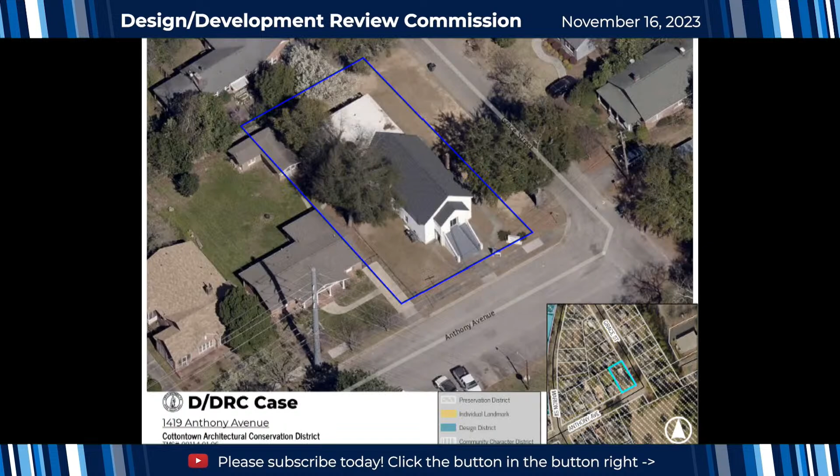The next case is 1419 Anthony Avenue, a request for preliminary certification for the Bailey Bill and for a certificate of design approval for exterior changes. This is in the Cottontown Bellevue Architectural Conservation District.

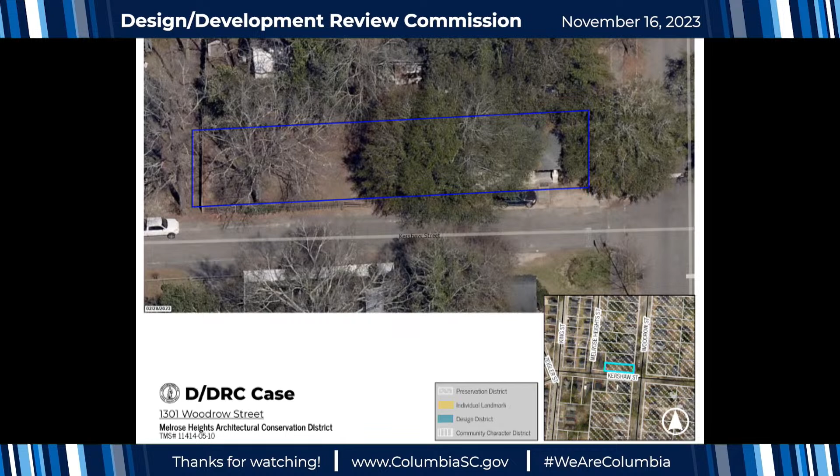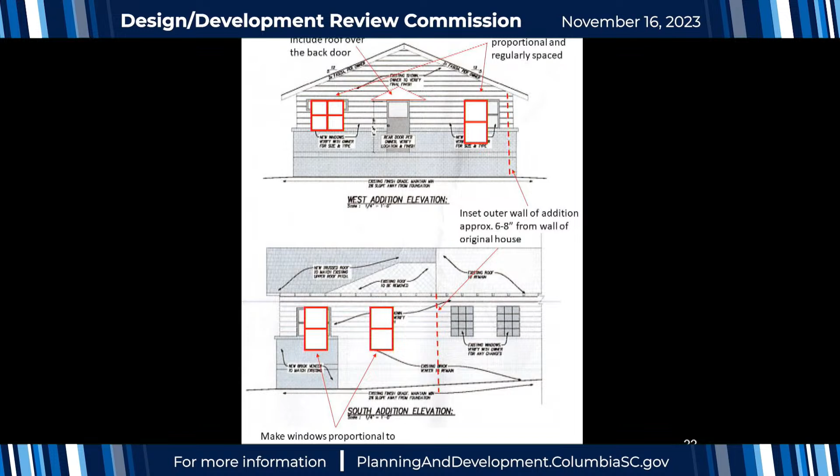The third item is 1301 Woodrow Street, again a request for preliminary certification for the Bailey Bill and for a certificate of design approval for an addition. This is in the Melrose Heights Oak Lawn Architectural Conservation District.

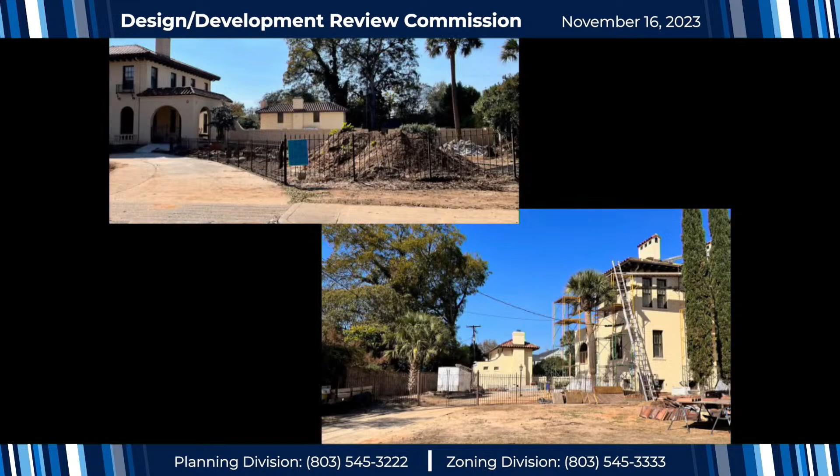Our last item on the consent agenda is 303 Saluda Avenue. This is a request for a certificate of design approval for an addition and an outbuilding. And this is in the Wales Garden Architectural Conservation District.

Thank you. Is there anyone from the DDRC that would like any item removed from the consent agenda? Is there anyone from the public who would like an item removed from the consent agenda?

Would anyone like to make a motion? I move to accept all the items on the consent agenda and to accept the meeting minutes. Or am I doing that one too? And the minutes from the last meeting. I'll second.

Mr. Broom? Yes. Ms. Sims Branham? Yes. Mr. Greenberg? Yes. Mr. Lee Decker? Yes. And Mr. Salibi? Yes. Motion passes.

Thank you. I believe we're moving on to the regular agenda now.

Can you all hear me? Excellent. So the first case on the agenda is 1245 Huger Street, which is next to 405 Gervais Street. The applicant is Seth Mendelson of Silver Hills Development, Inc., and it's within the City Center Design District.

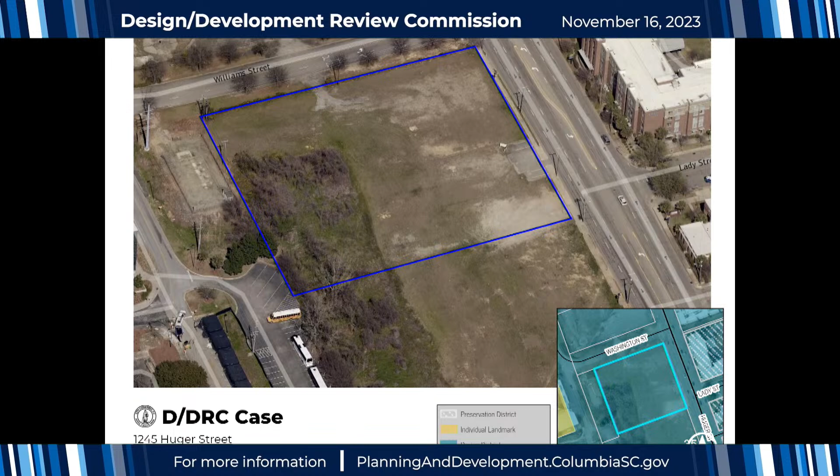So section 5.2 of the guidelines refers to the architectural style or theme. One of the public comments in September was that the architecture was contextually anomalous with regard to character, materials, and style of the district.

You can see here that the proposal includes significantly more brick and additional detailing, such as brick corbelling and relief patterns that are more in alignment with the character of the vista.

Section 5.2 addresses building mass and organization and reads, 'The height and scale of new buildings in city center should complement existing structures while providing a sense of human scale and proportion. New infill structure should be designed to provide storefront windows, doors, entries, transoms, awnings, cornice treatments, and other architectural features designed to complement existing structures without duplicating a past architectural style.'

This section outlines guidelines for building mass and organization. While these guidelines do not address the regulatory uses of the building, the city strongly encourages that in retail and commercial areas, the city center, the ground level of buildings should be developed with retail uses. Such uses draw activity to the street, thereby enlivening the area.

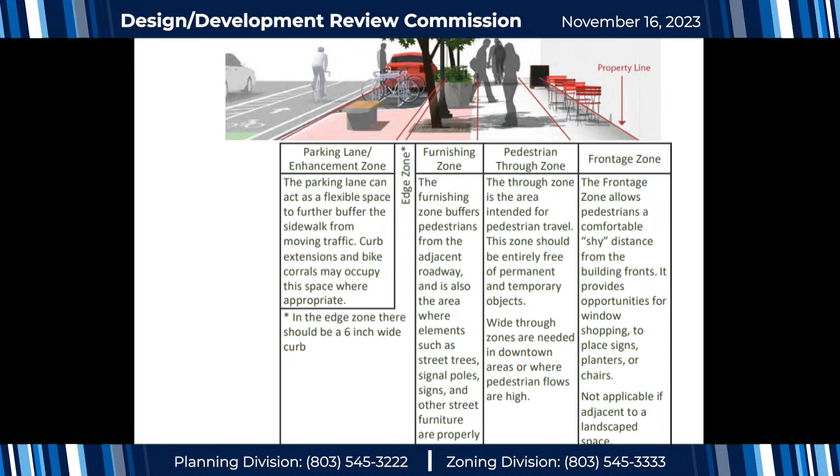So we also provided the applicant with section 9.3.11 of the engineering regulations, which outlines ideally what the pedestrian realm should look like adjacent to the street. You can see that in this slide.

Sidewalks are the most fundamental element of the walking network, as they provide an area for pedestrian travel separated from vehicle traffic. A variety of considerations are important in sidewalk design. Providing adequate and accessible facilities can lead to an increased number of people walking, improved safety, and the creation of social space.

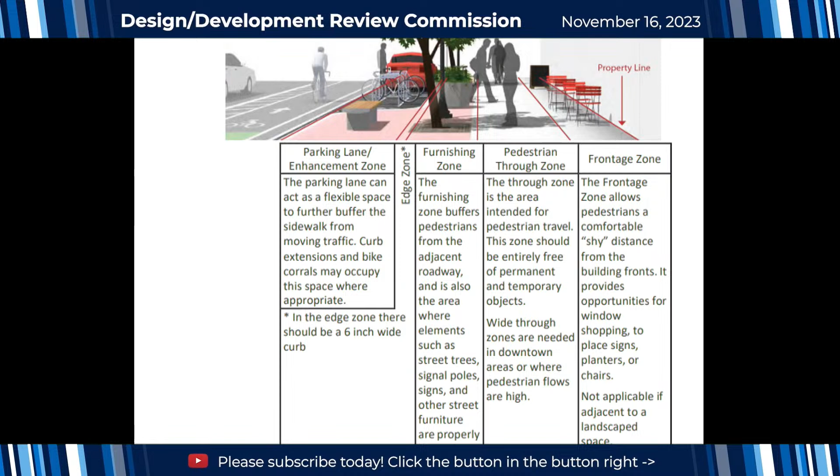Along Huger, the current drawings demonstrate a setback that varies between 9.2 and 15 feet with the rhythm of the architecture. The proposal includes an 8-foot sidewalk measured from the back of curb with 4-foot pinch points to accommodate 4-by-4-foot tree wells.

The trees are appropriately located between the road and the sidewalk to provide a buffer for pedestrians within the sidewalk. The applicant has provided pedestrian scale light fixtures in alignment with the trees.

Approximately a half foot to a foot of space remains between the back of the sidewalk and the property line.

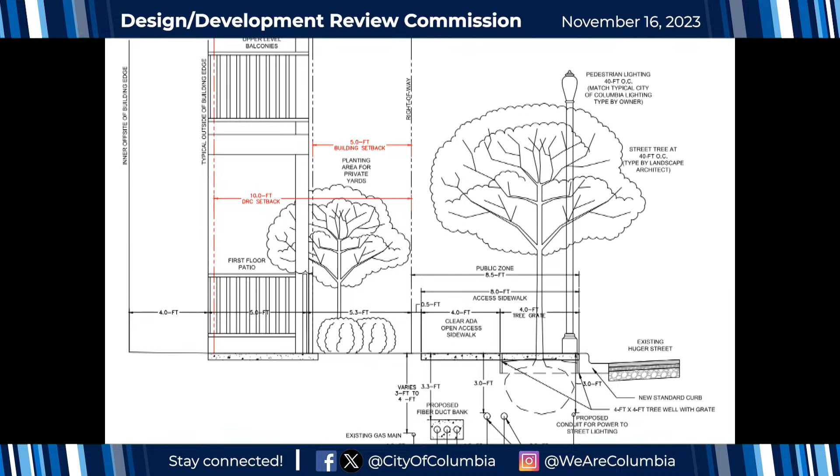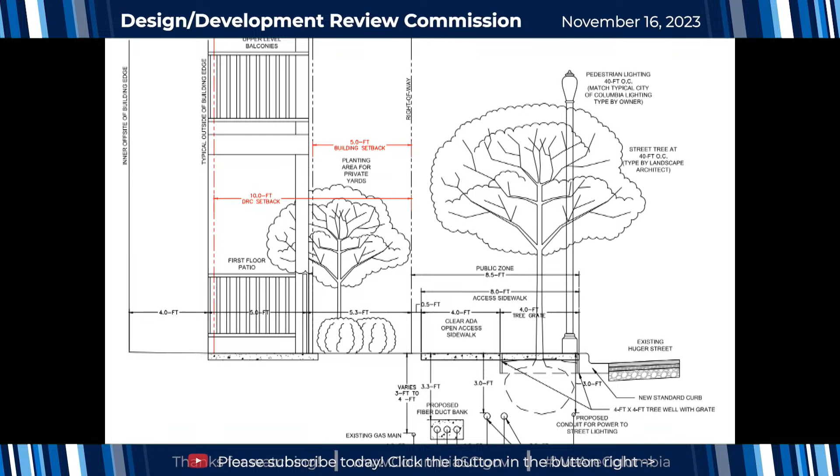The 9.2 foot to 15 foot area between the property line and the building contains two walkways to access the shared entrances, which are approximately 8 feet wide, one bench provided at each community entrance, three private first-floor balconies, six walkways to access private entrances, six small enclosed private yards, and a continuous 5-foot landscape buffer zone between the private yard and balconies and the public sidewalk.

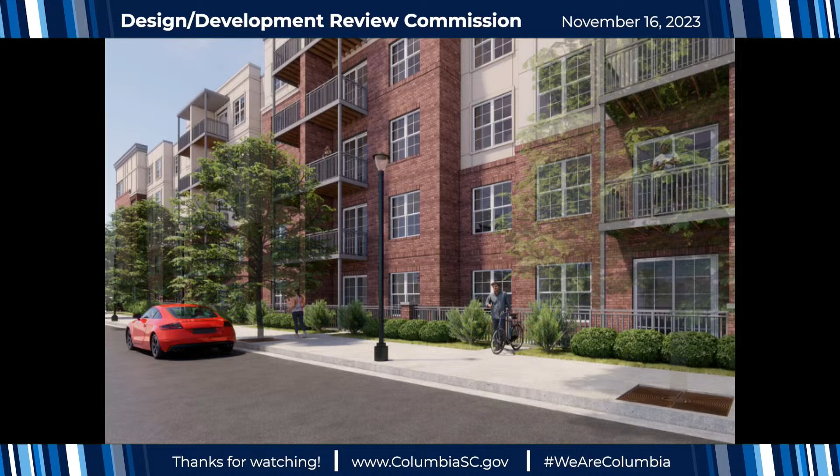Go back to that one.

Overall, the proposal provides a greatly improved pedestrian corridor along Huger. The landscape buffer combined with the aluminum picket fencing between brick pillars articulates a pleasing transition from the public to private realm, while softening the ground floor balconies and providing small yet welcoming private yards. These features will encourage residents to occupy the exterior spaces and activate the street.

In some instances, the metal picket fencing overlaps the metal balcony railings, creating an awkward double barrier.

Minor dimensional adjustments should be made to better accommodate trees and pedestrians, such as increasing the size of the tree wells and extending the width of the sidewalk in kind. So if they were 5-by-5 wells, retaining the 4-foot pinch points, to widen the sidewalk to 9 feet total. The wells will require adequate soil volume provided through the use of a suspended pavement system to meet the landscape requirements of the UDO.

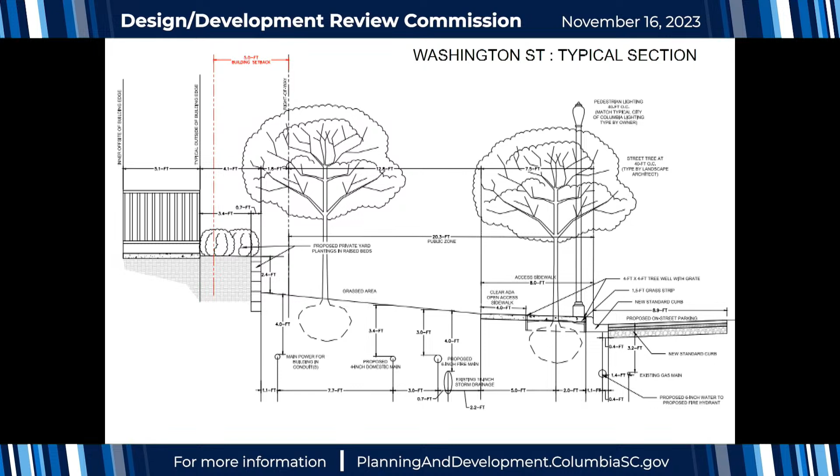Along Washington Street, a similar sidewalk condition is being proposed. It's an 8-foot sidewalk with the same 4-foot pinch points for 4-by-4 tree wells and pedestrian lighting in alignment with trees. The proposal includes the addition of 8 on-street parking stalls.

There's approximately 12 feet remaining between the sidewalk and the property line, which is proposed as a landscape buffer with additional trees.

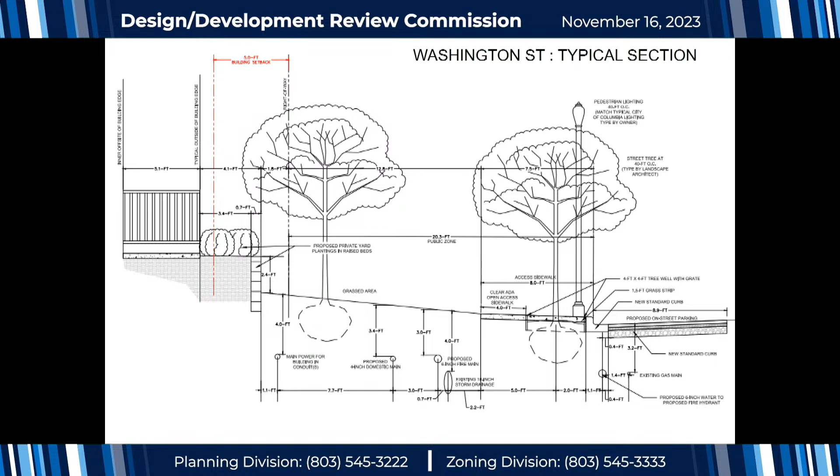There are 4 raised planters located between the property line and the building setback, which add interest to the facade, especially where the grade changes. This portion, you can see them in this elevation somewhat.

This portion of the sidewalk could also be improved through minor dimensional adjustments, as mentioned above, to better accommodate trees and pedestrians.

There's a minor utility vault encroachment in the proposed sidewalk at the corner of Washington and Huger. I just wanted to state that this should be worked out with the staff for a location that's not within the sidewalk here at this major corner.

5.4.2 addresses street orientation and states that the way a structure is oriented to the street plays a big role in establishing the overall feeling of the street. As a general rule, buildings should be oriented so as to engage and maintain pedestrian interest. The following are specific directions on how this can be accomplished.

Storefronts should be designed to orient to the major street frontages, while side or rear entries may be desirable. The predominant major building entries should be oriented towards the major street. The front building facade should be oriented parallel to the street or toward a major plaza or park. Buildings on corners should include storefront design features on at least 50% of the wall area on the street side elevation.

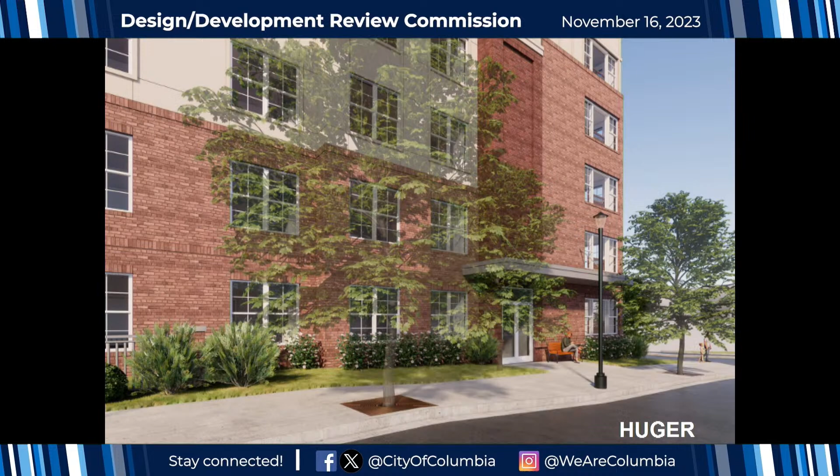These alterations include more prominent entrances along Huger Street featuring glass double doors, transoms, awnings, and benches, larger window openings on Huger at the corner of Huger and Washington, and ground floor private entrances to activate the street.

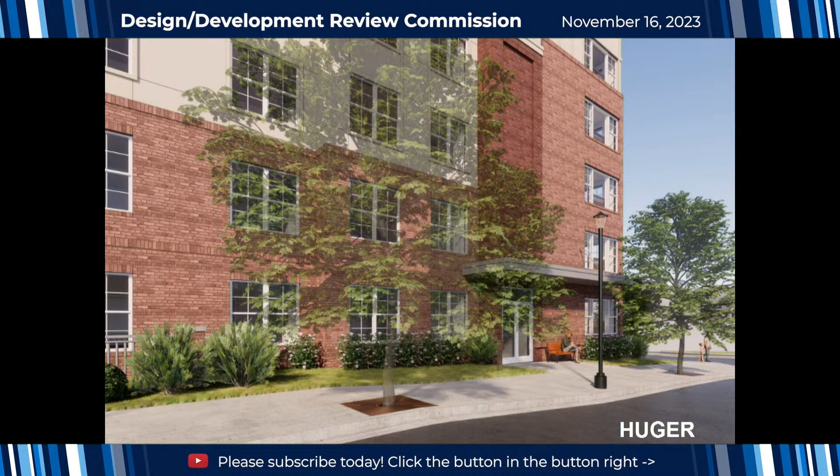Sorry, guess we're there.

The main entrance to the building remains on the west side, which is functionally the back of the building. Additionally, storefront windows have been added to this facade, but have no relationship to the public street.

Section 5.6 refers to landscaping, and the major thing I wanted to point out with this project is that the use of landscape is important in how they've chosen to address the public realm. It's a major component of the process we've gone through with them, and you can see it here along Huger Street.

A landscape buffer is important to address the use of residential facing this major thoroughfare. And here along Washington, the use of the raised planter beds was important to articulate the wall along the first half of the building as you go to the west.

Service and loading areas are addressed in section 4.4 of the guidelines, which state service and loading areas should be located to minimize their visibility from public streets on blocks with multiple sides facing gateway streets. Individual determinations of the more visually significant frontages will be required. Refuse containers and actively used service and loading areas must be screened from view by the buildings they serve, or by solid masonry walls designed as an integral part of the building, finished with compatible materials and with a minimum height of 6 feet.

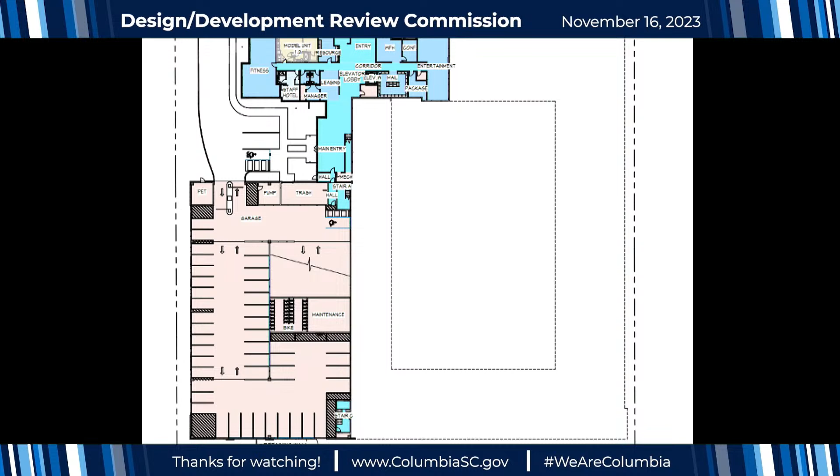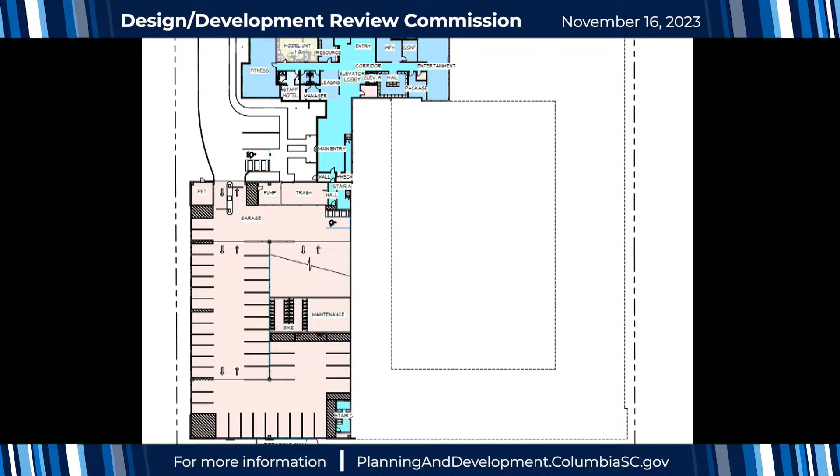Because this is the most prominent corner of the development and the current proposal is not providing storefront, a main entrance, or community amenities on this corner, rather it is mitigating the impacts of residential use through architectural features, it is imperative that the pedestrian realm at this corner appear resolved, humane, and inviting. In this regard, it is the least appropriate location for these utilities, and staff recommends that the applicant work with staff to relocate the proposed vaults to a less prominent pedestrian location.

Section 5.7 addresses the storefront and reads: this section focuses on establishing storefronts. Sorry, those are the vaults there at the corner. This section focuses on establishing storefronts that will help revitalize and unify city centers' commercial street frontages. It should be noted that the term storefront does not necessarily imply that a building has a retail commercial use. Storefronts are simply the sides of a building that face the street and connect with the sidewalk.

Section 5.7.1, storefront composition, accessories and details, entries and doorways, states: the main entry to a building leading to lobby, stair, or central corridor should be emphasized at the street to announce a point of arrival in one or more of the following ways: flanked columns, decorative fixtures and other details recessed within a larger arched or cased decorative opening; covered by means of a portico, projecting from or set into the building face; punctuated by means of a change in roof line, a tower, or a break in the surface of the subject wall.

Buildings situated at the corner of a public street should provide a prominent corner entrance to street-level shops or lobby space in a manner consistent with main entries as described above. Commercial storefront entries are typically recessed and/or sheltered by a covered arcade structure, canopy, or awning. This provides more area for display space, a sheltered transition area to the interior of the store, and emphasizes the entrance. Recessed entries should be retained and are strongly encouraged in new construction, although overly deep entries over 5 feet should be avoided, as they may attract transients.

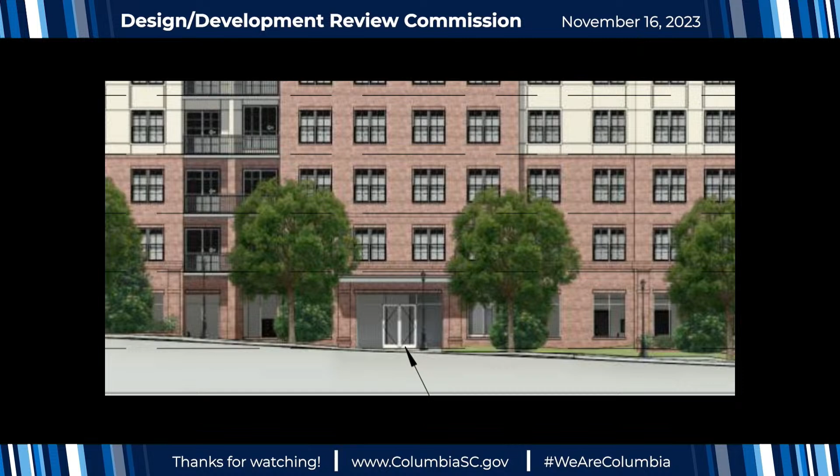Staff comments are: the Washington Street entrance has been better articulated using brick pilasters, brick corbelling, and additional brick veneer in the upper stories. Some ground floor balconies have been removed on the west side and replaced with storefront windows. The unarticulated wall along Washington has been enhanced, as mentioned, with raised planters and brick pilasters to add interest to the public realm.

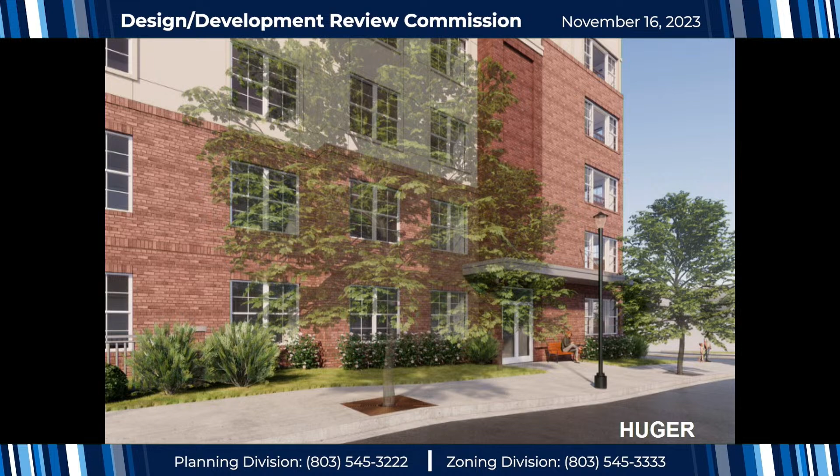The existing Huger entrance has been relocated closer to the corner of Huger and Washington, and an additional entrance has been added on the south side of the Huger street facade. Each entrance now has double glass doors, a transom, an awning, a bench, adjacent brick corbelling, and a recessed brick detail above. Additionally, the window openings on the corner of Huger and Washington facing Huger have been enlarged. Brick veneer extends an additional 2 stories up from the last submittal on the corner facade. There is no storefront along Huger.

Excuse me. However, the applicant has made a concerted effort to activate the street. As mentioned, the first floor units along Huger include exterior entrances and small humane private yards enclosed with metal picket fencing between brick pillars buffered by vegetation. By creating humane spaces along the street front, residents will be more likely to occupy the spaces, adding life and interest to the street.

This is something we worked together on, going back and forth on the iteration of how it interfaces this major thoroughfare. One of the things staff emphasized is the need for an adequate transition between the public and private realm. The vegetated buffer and creating more humane spaces between the sidewalk and the street would encourage residents to utilize that front porch area, which is important to street activation, as well as adding entrances so the building can be accessed directly into those units.

Door and window design in the guidelines reads: doors to retail shops should contain a high percentage of glass in order to view the retail contents. Use of clear glass on the first floor is recommended. Storefront windows should be as large as possible and no closer than 18 inches from the ground.

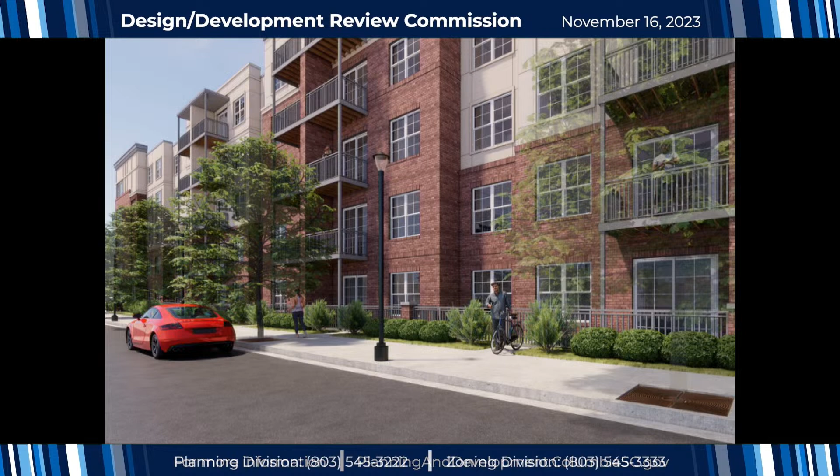Here you can see the west facade where the main entrance is located, which is the lower elevation, has additional storefront windows with residential amenities, but are not adjacent to the public realm.

The main entrance and public spaces, offering higher transparency and thus greater engagement with the street, are not situated to engage the most prominent street corner of the major thoroughfare.

However, architectural features have been added to mitigate the residential use of the first floor and on the prominent corner. These include ground floor private entrances, private yards, and balconies to encourage the front porch street interaction, plus two furnished entry points with awnings and larger residential windows at the corner of Huger and Washington.

Regarding grillwork, metal, and other details, the guidelines state there are a number of details often thought of as mundane that may be incorporated into a building design to add a degree of visual richness and interest while meeting functional needs. Such details include: light fixtures wall-mounted or hung with decorative metal brackets, metal grillwork at vent openings or decorative features at windows, doorways, or gates, decorative scuppers, catches, and downspouts, balcony rails, finials, corbels, plaques, etc.

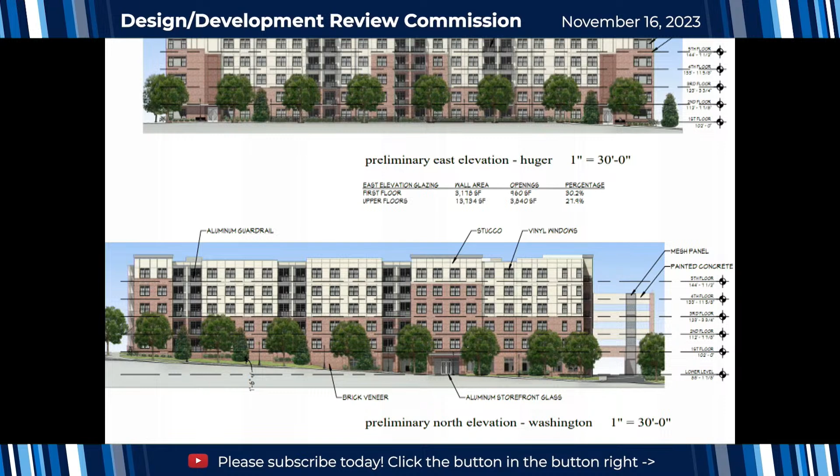Staff comments read: the proposal includes 3 varying cornice applications, along with minor variations in parapet height. Along Huger, the variations follow a regular rhythm. Along Washington Street, the variations do not follow a regular rhythm and detract from the overall resolution of the facade, leaving the second bay from the east looking incomplete with a lower parapet and less predominant cornice, which is visible in this rendering in the second bay from the east. You can see it's a little bit lower and the cornice is varied.

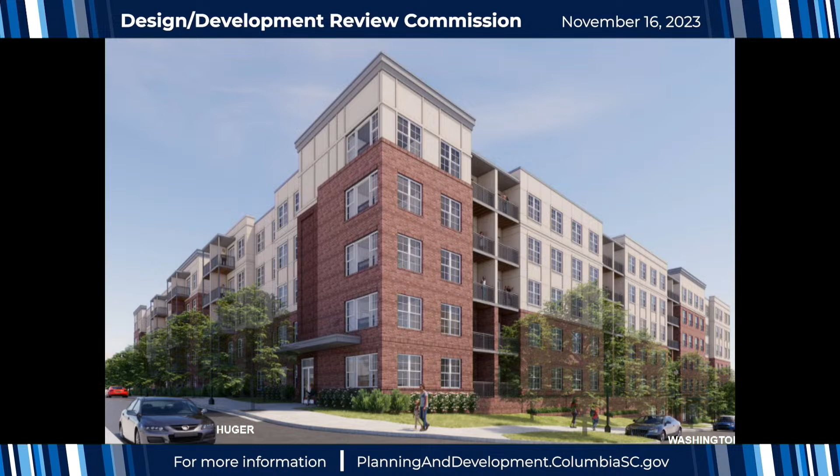Under section 5.8.2, wall materials: the wall materials should be selected to coordinate with neighboring structures and to complement the design of the storefront. Staff comments read: the materials include lap siding. It's pretty much the same comment as before regarding the lap siding on the north-facing facade.

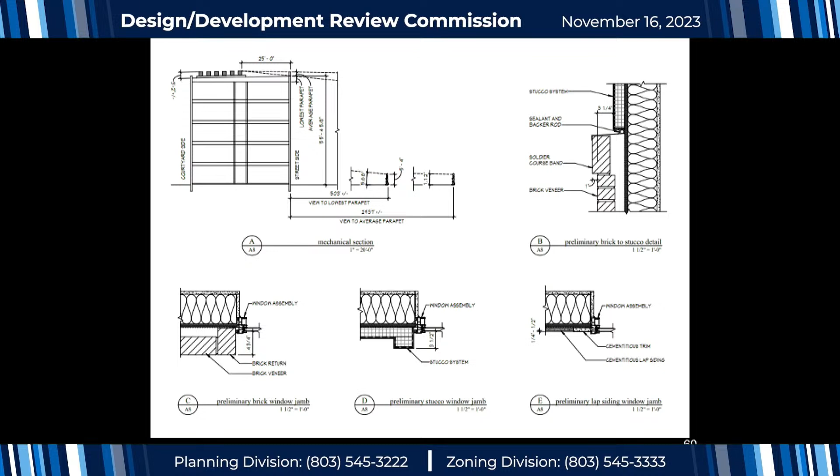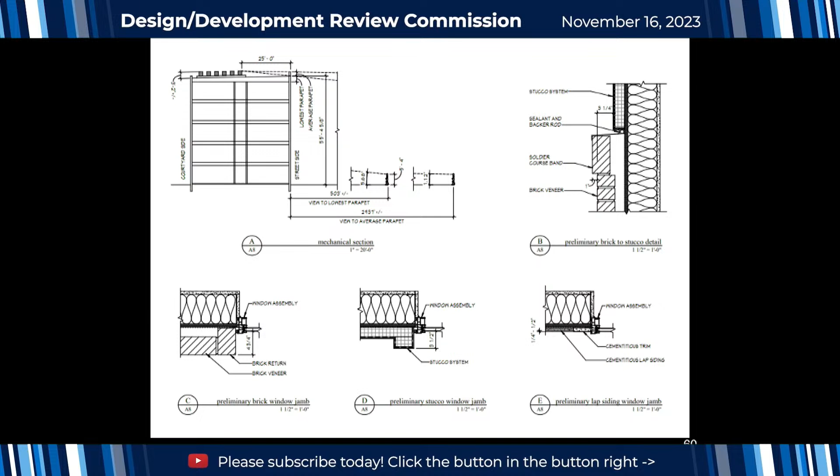Windows, upper story: the guidelines state in section 5.8.3 that upper story windows should create a sense of scale and add articulation and visual interest to the upper facade. Most of the windows in the development are between 3.5-inch and 4-inch relief, except for those within the portion of the building that has the lap siding application, in which those window details are 1/4 inch to 1/2 inch, which again is less than the recommended 4 inches, and more of a reason to deter this material from this application.

Section 5.10.1, structured parking, reads: where possible, parking structures should be located within the block core with actively programmed building space fronting all streets. Where location of parking within the block core is not feasible, parking structures should be located to the rear of the principal use building, with the principal use building oriented to front on the address street. The ground floor of the parking structure should be actively programmed on streets with active commercial frontage. The parking structure should be compatible in quality, form, materials, color, and textures with the structures being served. Parking structure roof lines which are visible from the street should be level. Ramping should occur within the structure and the interior of the block where it is screened from the street.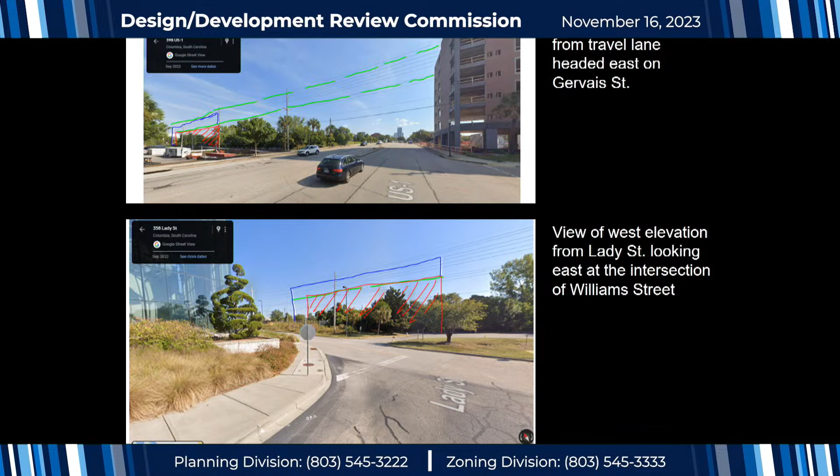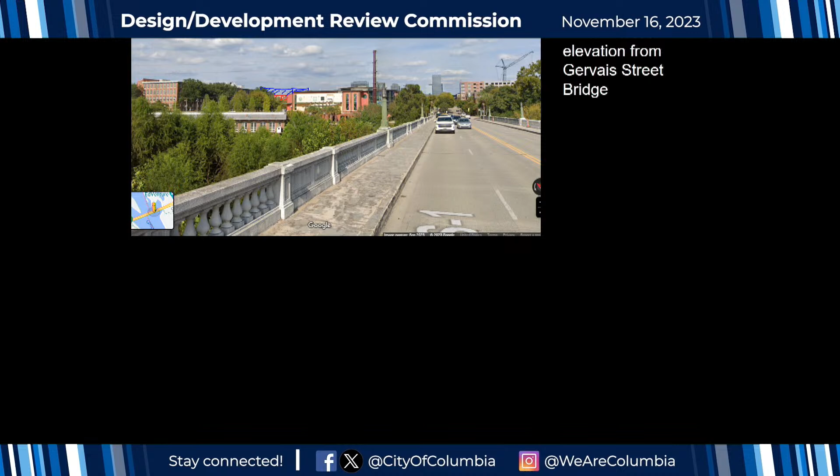So that's from Gervais Street, and a diagram of the visibility from Lady Street looking east at the intersection of Williams Street. There you can see it'll be minimally visible, but more visible from a pedestrian environment along the Gervais Street Bridge, which is a main gateway to the city. This captures some significant pedestrian view sheds where the back of house, or west elevation, will be visible from the right-of-way.

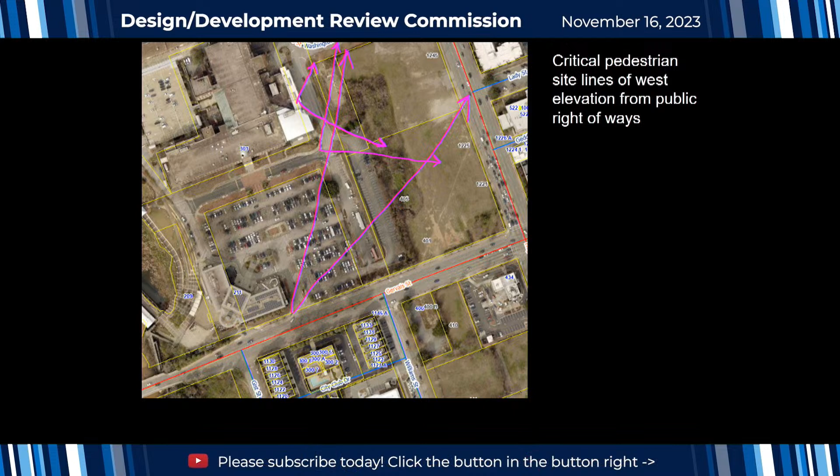The structured parking is situated such that it's visible from Washington Street, Lady Street, Williams Street, and Gervais Street, including minor visibility heading east on the Gervais Street Bridge. The future development on the south parcel will mitigate the visibility of the south facade from Gervais Street, but the aforementioned visibility will remain for the west facade.

Refer to the diagrams which I just went through, showing automotive and pedestrian view sheds. The parcel to the west is a utility service and not likely to be developed, which contributes to the long-term visibility of the structure in this configuration.

The applicant has effectively screened the ramping on the west facade. However, the materials are still incongruous with the quality, form, textures, and materials of the building it serves.

Staff finds the proposal overall to meet the city center guidelines and recommends approval with the following conditions. First, continue to develop the parking structure to mitigate the impacts to the public realm by utilizing consistent quality, form, materials, and textures with the building it serves.

Remove all lap siding as it's inconsistent with the architecture of the proposed building, inconsistent in quality and character to the surrounding neighborhood, and necessitates the use of 1/4 to 1/2 inch window jamb details, which is significantly less than the recommended 4-inch minimum.

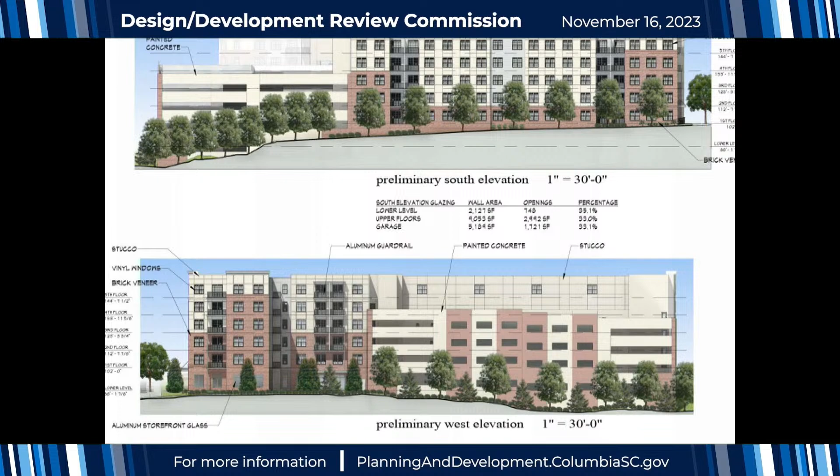Thank you for the report. Believe the applicant is present and as such has 10 minutes to address DDRC if they would like.

Please state your name and do you swear to tell the truth in these proceedings? My name is Seth Mendelson, and yes, I do. Thank you.

We're very excited to be working with the city. I think we've done a good job, and we'll continue to work to make a design that we're all very proud of. You can see the city has spent a lot of time and has been very thorough, and we're very excited for that. Just wanted to thank everyone for their time today.

Now, Mr. Mendelson, before you take your seat, I want to give DDRC members an opportunity to ask any questions if they have any.

Mr. Chair? Yeah, absolutely, go ahead. Mr. Mendelson, thank you so much for clearly a lot of work from the last submittal to this one, working with our fabulous staff to really start to understand where these guidelines come from. I think y'all have done a great job in trying to really meet some of those requirements. There's quite a few still recommendations here that staff has outlined. Do you have any objection or thoughts about the ones that have been outlined here?

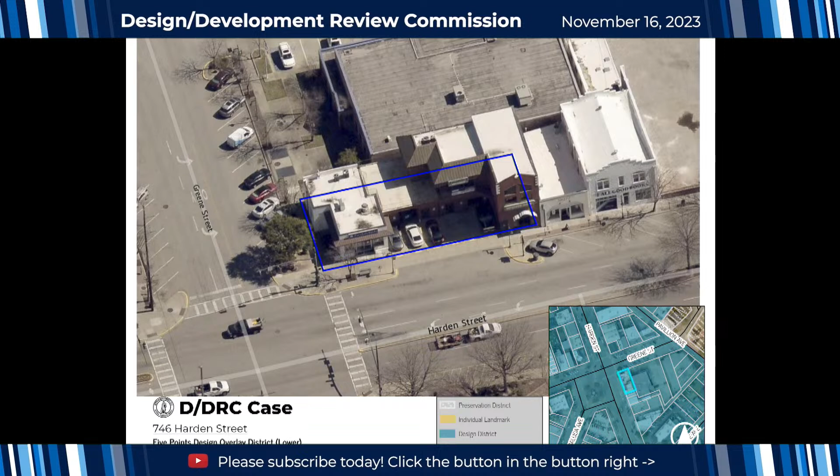An existing alcove in the front of the building facing Harden houses a dumpster, which has been there for many years. The applicant has been struggling with people using the alcove for illegal and dangerous activities and wishes to secure the space. The 5 Points Urban Design Guidelines require that when a non-conforming condition is improved, the improvement must meet the design guidelines. Therefore, a gate in front of an exposed dumpster must provide screening per section 3.3, minimize the presence of service areas, in order for it to receive a certificate of design approval.

The request is to provide an arched metal picket gate at the front of the rectangular opening to enclose the space. Staff has asked the applicant to provide some type of screening to attach to the gate to help screen the dumpster from the right-of-way. The screening is not required to be opaque, and staff is recommending a translucent screen that would provide visibility into the space while also providing some level of screening.

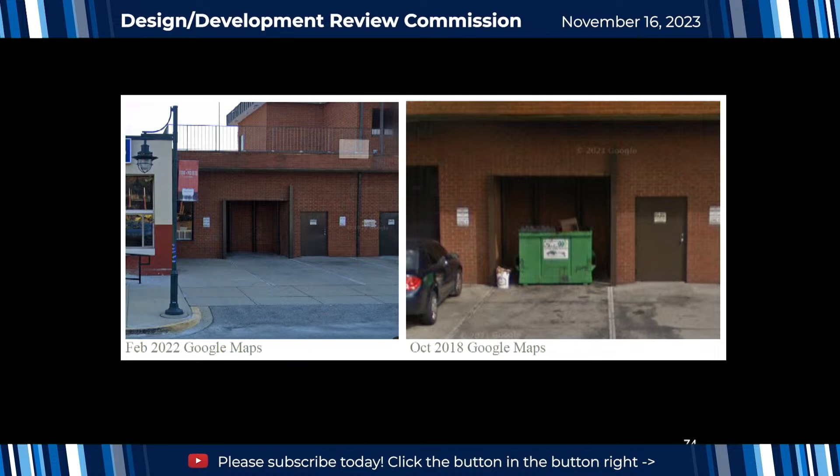The applicant is opposed to any level of screening due to security concerns. While the aesthetics of the arched gate design are acceptable, staff has suggested that if the gate design completely encloses the space, for example, a rectangular gate to fill the rectangular opening, access would not be possible, and therefore security issues would be moot. There is an existing pedestrian gate on the exterior stair on the building's facade that has a metal mesh screening and is one of the recommended materials as shown on the screen.

So just a couple of the relevant guidelines in the 5 Points Overlay District. 2.3, design for personal safety and security, says provide adequate lighting and avoid building features that provide hiding places for criminal activity.

The staff comment is the proposed gate will provide a needed security feature that will prevent people from accessing the alcove. As noted, a gate that encloses the entire space would provide a more secure space than the proposed arch gate, which could possibly allow entry over the gate at the corners. Lighting could also be utilized to deter criminal activity.

Section 3.3 of the guidelines says to minimize the presence of service areas and screen service areas to be less visible, using durable screening materials that complement the building. Staff comments note that since the service area is existing, the condition is considered grandfathered and can exist unscreened. Since a gate is being proposed, however, some level of screening is required to meet this guideline.

The staff recommendation is to approve the request to install the gate conditional upon one of the following screening solutions: one, the gate is designed with a metal mesh panel attached, similar to the one that exists on the pedestrian gate to the exterior stair; two, a gate similar to what is proposed but rectangular, to enclose the entirety of the space with a mesh panel, and if desired, the curved metal detail similar to the pedestrian gate for design continuity; or three, another screening material to be proposed by the applicant that provides screening and also allows some visibility into the space.

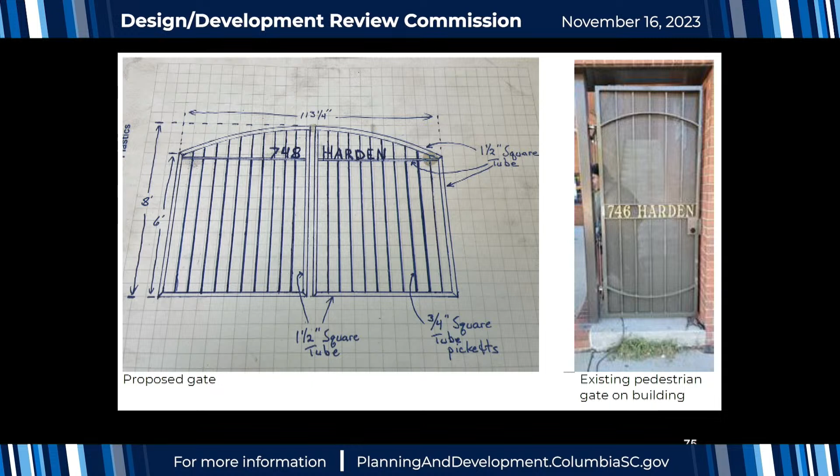Any other comments or questions? Is there anyone from the public who would like to speak about this project? All right. Unless any members of the DDRC have additional comments or questions, we can open it up for a motion.

I'll make a motion to approve the request to install a gate at 746 Harden Street, conditional upon one of the following screening solutions. One, the gate as designed with the metal mesh panel attached, similar to the one that exists on the pedestrian gate to the exterior stair. Or two, a gate similar to what is proposed but rectangular to enclose the entirety of the space with the mesh panel, and if desired, the curved metal detail similar to the pedestrian gate for design continuity. Or three, another screening material to be proposed by the applicant that provides screening and also allows some visibility into the space.

Second. All right, thank you very much. Is there any discussion? Hearing none, will staff please call the vote? Mr. Broom, yes. Ms. Sims Branham, yes. Mr. Greenberg, yes. Mr. Lee Decker, yes. And Mr. Salibi, yes. The motion passes.

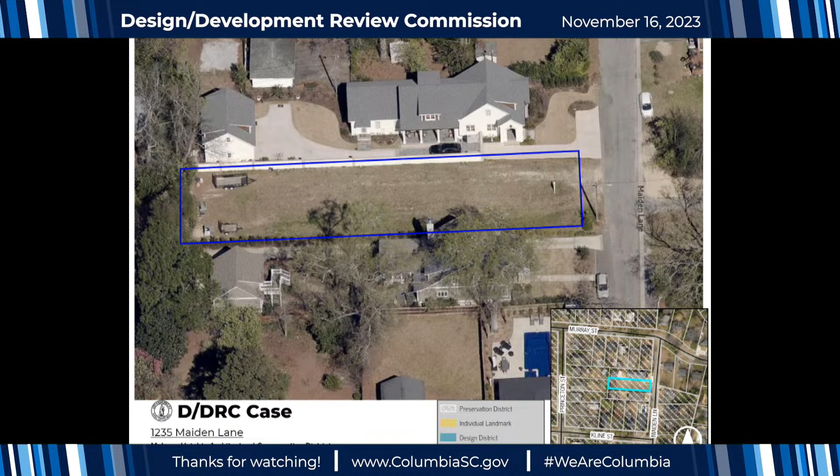A previous design for this lot was reviewed and approved by the DDRC in 2022. The proposed design of the building has been altered since that time and thus requires review by the DDRC again. While most elements of the design are compatible with the district guidelines for new construction, staff does have a few concerns as it relates to roof shape, rhythm of openings, sense of entry, and materials, textures, and details.

Chief among staff's concerns is that a front door is absent from the design. Front entryways are fundamental to the design of homes within historic districts, and the inclusion of sense of entry as its own guideline in the new construction guidelines underlines the importance of this critical design element.

As proposed, the house does not have a front door, as the applicants wish to use the side doors as their primary entrance. The side entrance is in the middle of the side elevation, roughly 40 feet back from the front of the house, and over 65 feet back from the street, accessed off the driveway and behind driveway gates.

While using side entrances or even back doors for a building's primary access is common, historic buildings within this district also have a front door at the front of the house. Any included front door is not required to be used as the primary access, but it should still be present as part of the design.

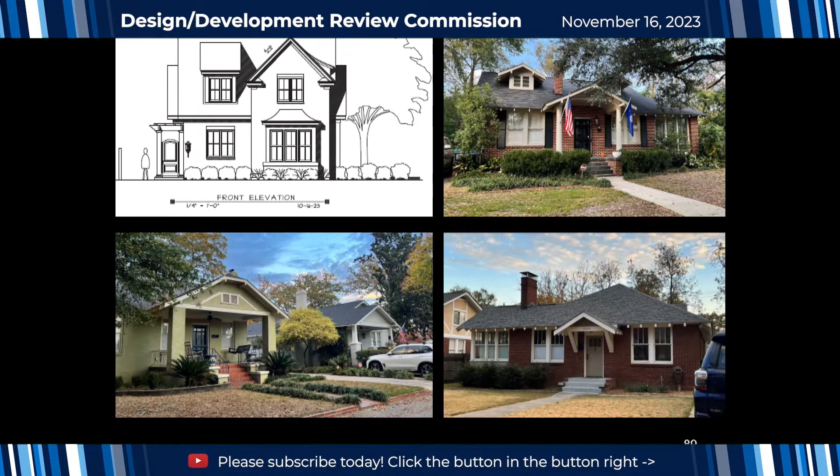Although there are many different types of entryways that could be added to this building that would be compatible with the design of the house and neighborhood patterns, it is not always simple to add such a critical element to an existing floor plan. Staff recommends that the applicant give further consideration to the inclusion of the front entryway that is part of the overall design and resubmit drawings once this element is added.

Staff's other primary concern is the inconsistent design of the frontmost dormer on the right side of the house. Not only is this dormer positioned much closer to the front elevation than is typical, this dormer cuts through the eave, which is not a pattern staff has found in this district. As the dormer is inconsistent with the neighborhood patterns and inconsistent with other dormers found on the house itself, staff recommends eliminating this side dormer.

When considering new construction, it is important to look at the greater pattern of the neighborhood rather than individual outliers that deviate from the whole. For example, using the Prairie-style Powell House as an example for new construction in Melrose would not be recommended, as it is an outlier in style, size, and form for this district, although it is a big part of the district as well.

While it is occasionally approved to use less common or less historic details for new construction, such as allowing for painting new construction brick when it's not allowed for historic brick, it's not recommended for every element, especially something as fundamental as an entryway.

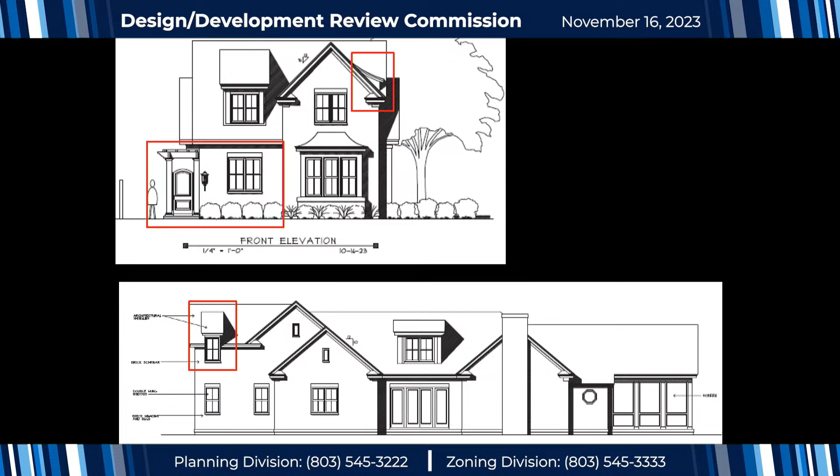Sure. So the way it cuts through the eave like that—most dormers are going to be sitting on top of a roof, and that's how they are historically in historic districts. If that particular dormer type was on the back of the house, you probably wouldn't see it, and it probably wouldn't be an issue. But because it's so far forward on the house, the pattern of it and its closeness to the front is not something we see in the district, which is why I'm recommending it either be altered in some way or eliminated.

Okay. Now, the house is already built. Where's the front door of that building? The house is next door.

You can see here—so what I'm looking at, the house on the right has a door on the front. Yep. And then, yeah, they both have doors and entryways that face the street. Well, to be clear, the one on the right actually has an opening, but the door is on the side. Exactly, yeah, which is a pattern you see in the neighborhood.

Which I think may have even been—no, I think they had a stoop on the original design of this, but the door was still facing the street. But we have allowed for doors that don't face the street. Makes me kind of wonder how the post office is going to handle that. I don't know.

Is the applicant present, and would they like to speak on the project? If you would please come forward.

I know on maybe some of the larger commercial proposals that we hear, there's concerns about the appearance of parking garages and things, and just aesthetically, the plans are amended just so it looks like there's a functional component when there really isn't. It's just sort of to make it appear consistent with the surrounding area.

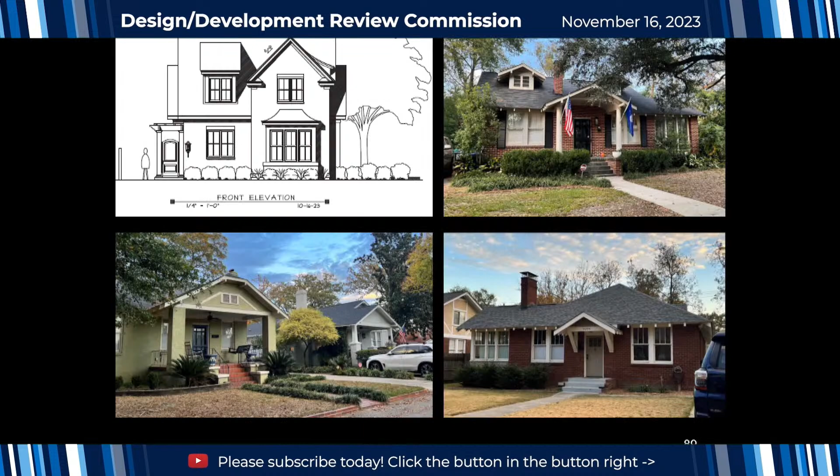There are a few homes in the district, and Rachel had pointed those out in her review, and I had mentioned them, that do not have a front porch. They have other aspects, though, that are called a sense of entry. And so, again, we feel that we can develop, even though it's not fully developed right now, that the pergola and the gate and all of that to have a sense of entry.

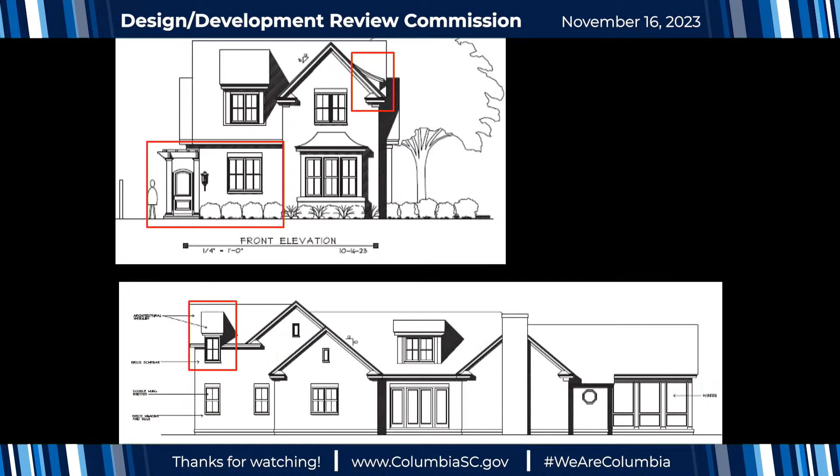I'm looking at a letter from Manning. Is that the neighbor? This, Oh, that's Manning? yeah, Days lives on the, Days, I'm sorry. Okay, he seems to be very favorable of what you have. And from what I've seen so far, you've done an excellent job with that block, with 3 houses on such a narrow lot. And giving the owner his wish, as long as you got what this letter said, I'm in agreement with what you got designed, thank you.

Okay. The other neighbor is here too, and is very supportive.

So Robin, do I hear you saying that you think you could develop something that allows that entrance to access the main doors that are in the middle of the house? Because I think if you could show us that progression of how it gets you from that door to that door, I could get behind it. Okay. But if it's not fully worked out, then I'd defer that to staff if y'all are willing to. That would just be what I would want to see, not saying that's what the other commissioners would say. But if you think you can do that, then.

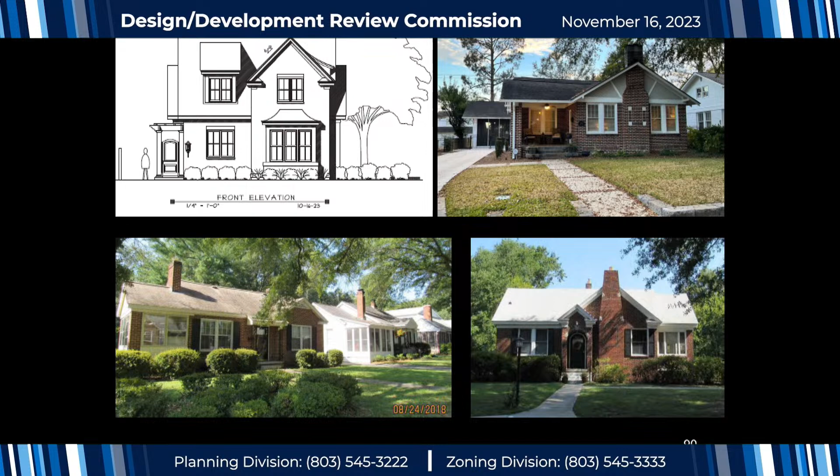And in my mind, it is developed to still be exterior access, not a walk, not something off of that pergola that goes into the house directly there. It's something from the pergola that leads then. Yeah, that's what I'm saying. If you do it on the exterior, I could even support it, as long as it is really a door, if you could work through that, and I think you'd get more use out of it for y'all to use it, the pergola area.

Okay, yes, I think we can. I think that was our plan, to have something that would walk people through - obviously if we're having guests over, we'd open that door, turn the light on, and it would be obvious that's where you'd walk through. If someone rings the doorbell, we'd come out, greet them, and walk them back. We'd want a way to do that which was well laid out and well thought out. But we were thinking of that more in terms of landscaping than architecture at this point.

So just wanted to confirm that we're talking about installing a real front door, not a pergola gate, but a front door into the architecture of the house.

No, I think it's about creating a sense of continuity between that false front door and the actual entryway. Not to steal anyone else's thunder, but the language I'm having a hard time getting past says the main entry should be consistent with other structures in the neighborhood. I'm paraphrasing since I'm not looking at the guideline language, but similar to the house next door - I don't think that means the front door necessarily needs to face the street, but is that a pergola?

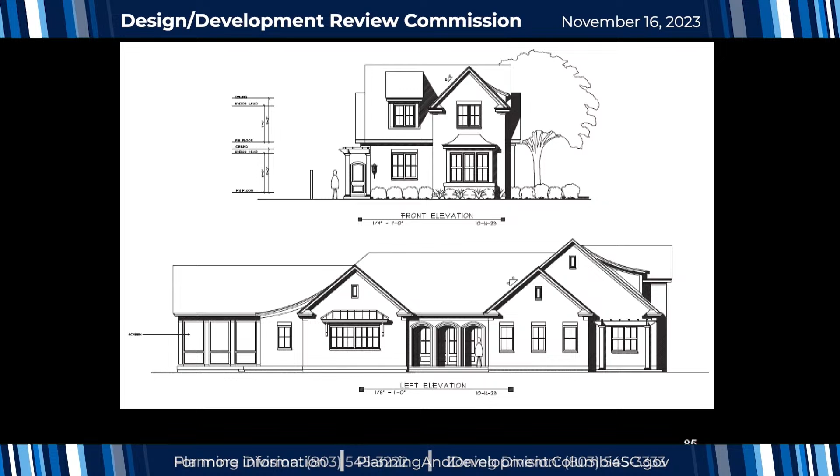Perhaps it doesn't lead to nowhere. I think the discussion is that we expand on these initial elements and take that portico and expand it down to the arched entry. Maybe it's not a pergola but more of a structure they could utilize. I think we could get behind deferring it if you all need to work through those details, unless staff feels comfortable you could work through the details as is.

The other point I'd make - there's one part of this design I don't think we intended, which is the gates to the driveway. The intent was for those gates to be on the same plane as the entrance, so the entrance would look like a Charleston single house entrance, with a solid door that wouldn't enter into the house itself, but in Charleston would enter into a gallery porch. Here it would enter into that passageway and go down, which would be the obvious place to enter because there'd be a set of driveway gates on the other side of it, accentuating the sense of entry.

Okay, I'm not following exactly - you're saying the gates aren't really where shown on that site plan, Robin? They're farther back? Our thought was to move the gates up so they were in the same plane as the door, as the covered portico gate. Okay, thank you - that makes more sense, because then you're not separating that front portico from your actual entry. No, it becomes the only entry unless you're driving a car in - that would be the idea.

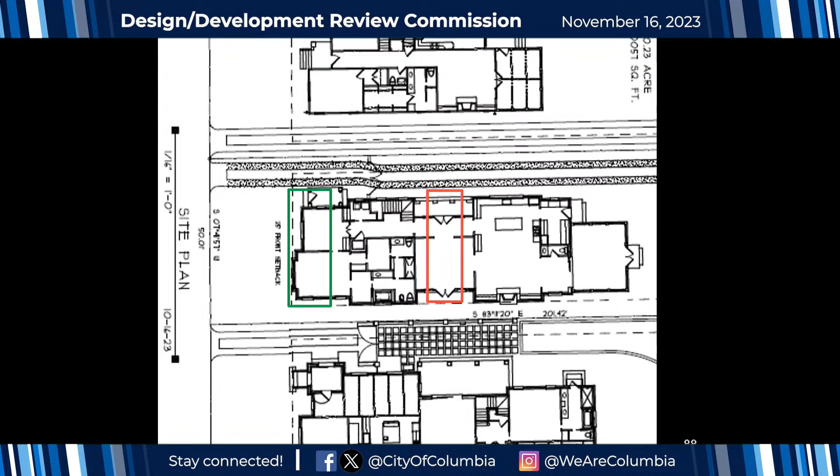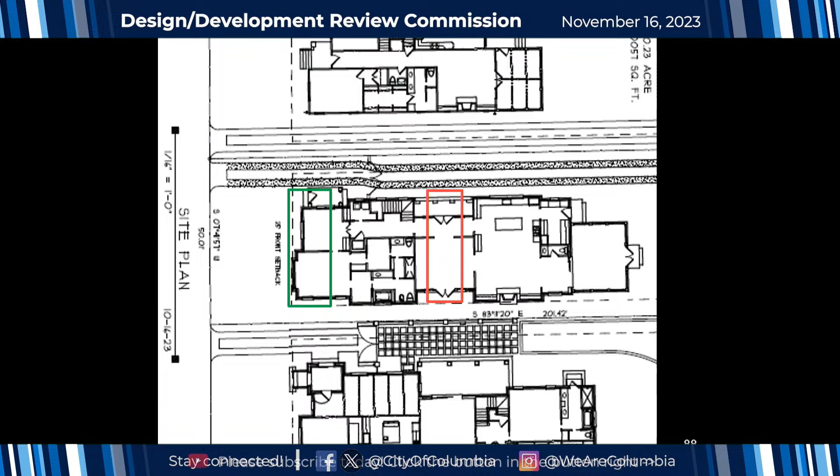I'll reply to that. And again, I appreciate what you all do. I think our conversation is, we seem to be stuck on one, I would say, minor design element. When you look at the neighborhood and the district, and I have spent hours driving through the district, there are many, many homes that do not meet all those 9 design principles.

And I know they were probably grandfathered in, but there are some newer homes being built, and I think a few of them we submitted, that this house is probably something that someone would stop and take a second look at. Where some of the others that have been approved, I would dare say you wouldn't.

So we think, given the adjacent homes, the nature that this is just a 2-block area on the very border of the district, when you talk about surrounding homes, there's really no surrounding homes. There's 2-story, very nondescript brick apartment structures across the street, and the whole 2 blocks is not even included in the district across the street.